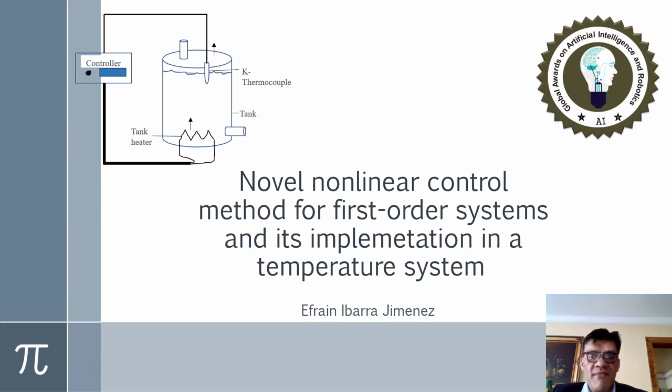The topics that we are going to cover in this presentation are the following: problem statement, main contribution, development theory for open loop control and closed loop control, simulations, and implementation in a temperature system.

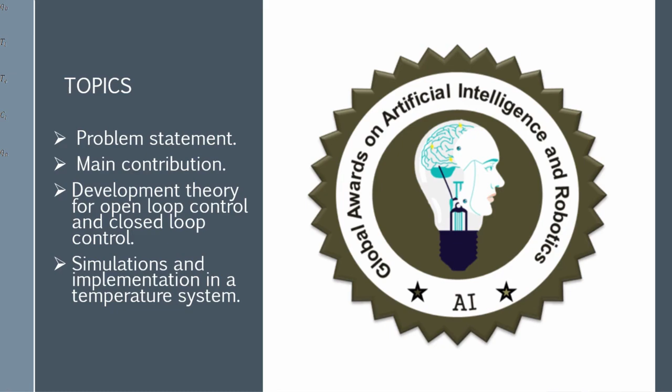Problem statement. Among the existing control theories for linear systems, the transfer function concept is commonly used in the design of industrial controllers, since the location of the poles and the definition of the type of stability and solution are easily known.

Therefore, for a linear differential equation, zero initial conditions are always assumed. However, this does not always apply to all systems. In addition, the output response is usually analyzed using an input control as the unit step, mainly because it is easier to obtain an analytic solution and the setting time when the solution is close to the reference at 98%.

For this reason, it is necessary to establish a theory that contributes to the proximity to the desired reference and to be able to control the slowdown or acceleration of the output response.

In this work, the main purpose is to develop a generalized nonlinear control theory that can be used in a first-order differential equation system for solving all the trajectory tracking problems, both for constant and time-variant references, and considering any initial condition.

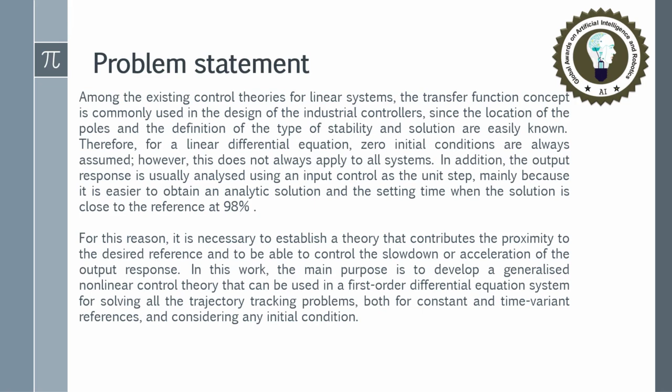Main contribution. The main contribution of this paper is to introduce a new control design method for a first-order differential equation that guarantees the following points.

Number one, the output signal response can follow constant or time-variant reference. Number two, the initial condition for a first-order differential equation can be selected with freedom, implying that the transfer function is no longer necessary, since this concept limits the realism of physical systems by considering that the initial conditions are always zero.

Number three, analytical solutions are found for tracking constant and time-varying references, which makes it possible to avoid using any numerical methods.

Number four, a closed-loop control formula is obtained for tracking constant or time-varying references. Number five, the designed controllers allow for acceleration or deceleration of the convergence rate to the desired reference.

Number six, the controllers can be automatically tuned to allow the desired reference to be reached with a small error and achieved in a finite time, which can be proposed to our liking, where this fact is defined in our article as the percentage convergence.

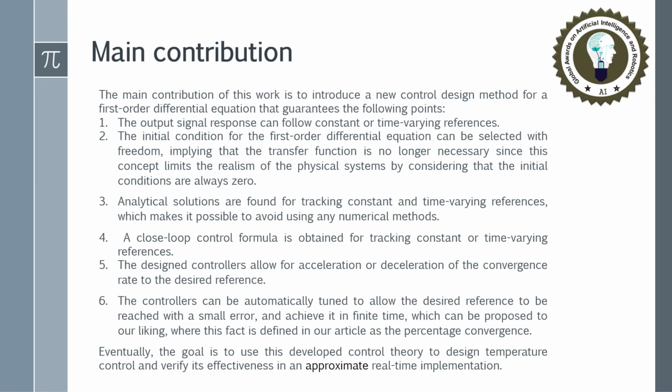Eventually, the goal is to use this developed control theory to design temperature control and verify its effectiveness in approximate real-time implementation.

Control theory designed for a first-order differential equation. Between the developed theory, we can find two different kinds of controllers, the open-loop control and the closed-loop control, where the main differences will be described.

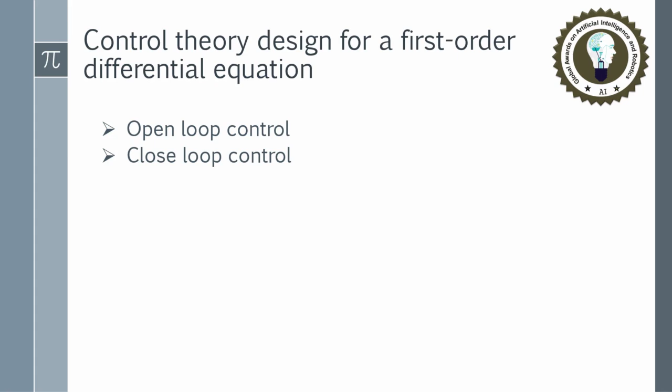Open loop control. Consider the first order differential equation given by expression number 1. Then, to guarantee the tracking to a time-varying reference R of t, it is necessary to introduce the following theorem.

Theorem number 1. For the system number 1, proposing the controller U of t given as this expression, with known references R and R dot, its solution is given by this expression. And we will have that the solution approaches the time-varying reference when time goes to infinity, only for values of a higher than 0.

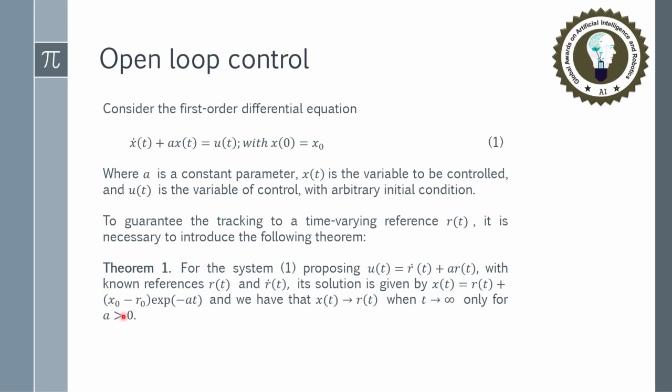Remembering that the error is given by the difference between the solution and the desired reference, we have the solution x of t is equal to r plus some initial error times exponential of negative at. And if the parameter a is higher than 0, then this exponential goes to 0 when time increases. Therefore, we have proven theorem 1.

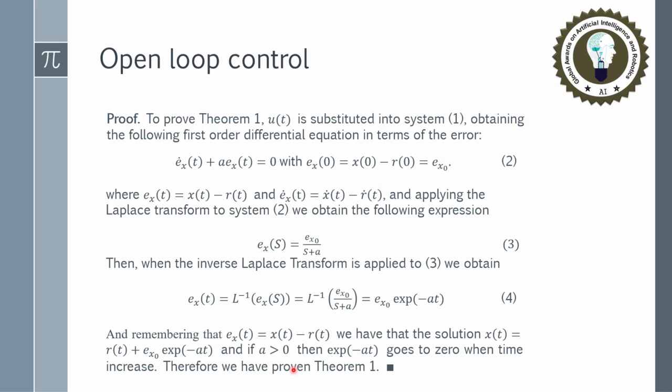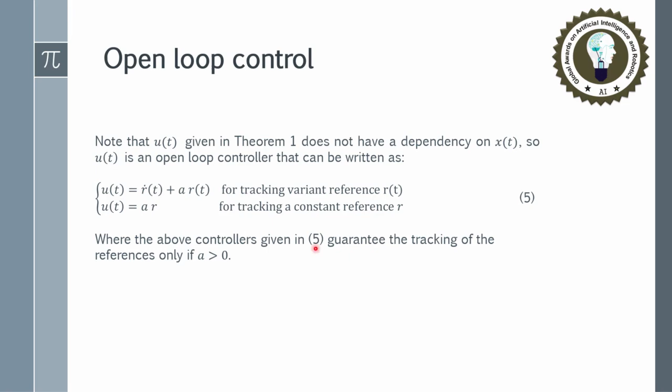Note that u of t given in theorem 1 does not have a dependency on the solution. So, u of t is an open loop controller that can be written as equation number 5, where the first serves for tracking a variant reference, the second for tracking a constant reference, where the above controllers given in 5 guarantee the tracking of the references only if a is higher than 0.

Closed loop control. Now, in order to control system 1 for any constant parameter a, and to make the solution track any reference, we introduce theorem number 2. For system 1, proposing that the control is given by this expression with k lower than a, and with known signal references r and r dot, we obtain that the solution will approach the variant reference when time goes to infinity.

Proof. For proving theorem 2, u of t is substituted into system 1, obtaining this first-order differential equation in the error dynamics. Now, applying the Laplace transform to equation 6, we obtain expression number 7.

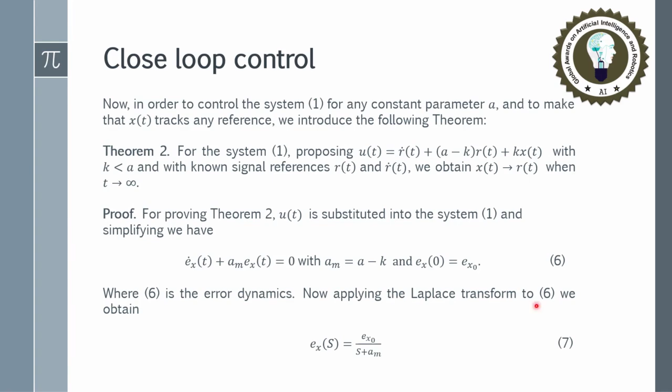And applying the inverse Laplace transform to 7, the solution ex of t is given as expression number 8. And remembering that the error is given as the difference between the solution and the desired reference, the solution x of t is given as expression number 9.

As in the hypothesis, k is lower than a, meaning a sub m is always higher than 0, implying that the negative of a sub m is negative. As a consequence, the exponential goes to 0 when time goes to infinity. Hence in 9, we have that x approaches the reference when time goes to infinity. Therefore, we have proven theorem 2.

Also, observe that the reference is constant for all time, then the derivative of this reference will be 0 for all time, implying that in this theorem, the controller will be given by this expression.

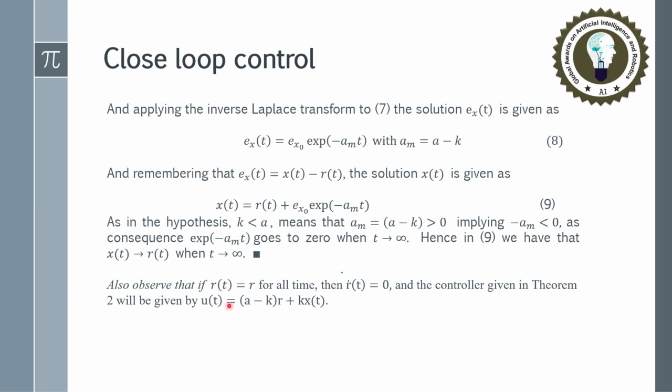Now, u of t given in theorem 2 has a dependency on the solution, so u of t is a closed loop controller that satisfies the following. Here we have this control that will serve for tracking a variant reference, and this will serve for tracking a constant reference. In both cases, the convergence to the reference can be sped up or slowed down.

Because in solution 9, the parameter a sub m, which is positive, can be modified with different values of k, implying that the exponential term decreases to 0 quickly or slowly, depending on the choice of k.

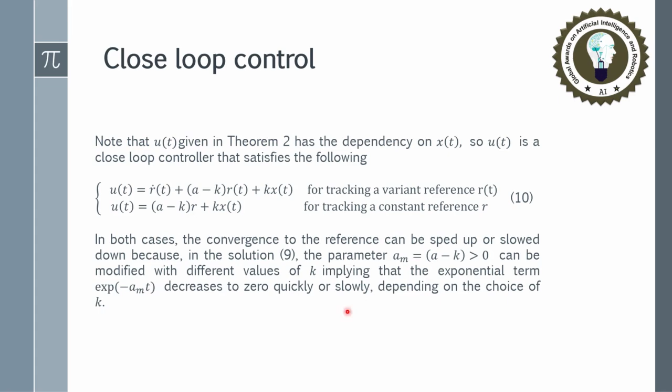The generalized settling time Ts. Now suppose that we have selected some k lower than a, and according to theorem 2, the solution approaches the variant reference when time goes to infinity. However, if I want to estimate the time Ts when the solution x of t is very close to the reference r of t...

...consider the general solution in terms of the error given by this expression, and suppose that for some time t equal to ts, we have the following, given in equation 11. The above implies that the exponential will be given by this expression when evaluated at this time ts. And when applying the logarithm to both sides, we obtain equation number 12.

Hence, equation 12 represents the necessary time to reach the P% of the initial error between x sub 0 and r sub 0, and Ts is called the generalized settling time.

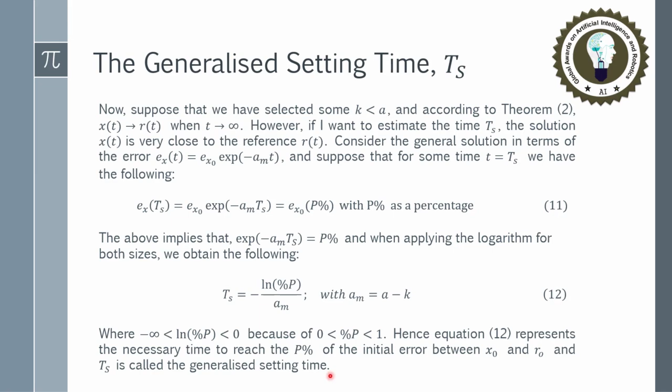Approaching the desired reference. To determine how close the solution is to the reference r of t at time Ts, notice that according to 10, this expression will be fulfilled, and then we will have that approaching the variant reference at this time will be given by 13.

And if the variant reference is constant for all time, this will be fulfilled, implying that the approaching to the constant reference will be given by expression 14, where 13 and 14 indicate how close the solution is to the reference at time Ts. And selecting an adequate percentage, the time Ts can be modified by assuming distinct values of k.

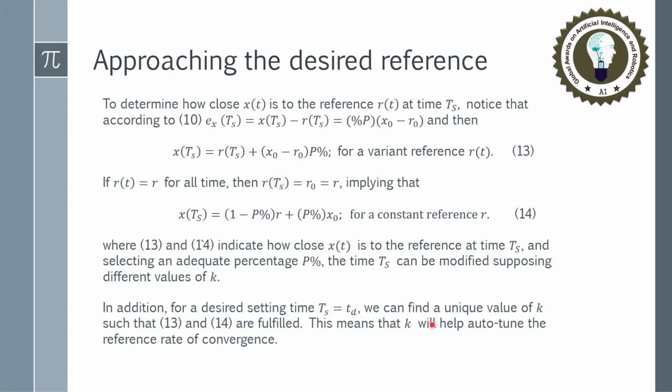In addition, for a desired settling time, we can find a unique value of k, so that 13 and 14 are fulfilled. This means that k will help auto-tune the reference rate of convergence.

Now suppose that we have selected some percentage and a desired settling time td. Therefore, we obtain 15, where the first represents how close the solution is to the variant reference at this desired settling time, and the second represents how close the solution is to the constant reference at this settling time.

In addition, satisfying 15 in a finite time TD implies being able to speed up or slow down the rate at which the solution x of t approaches the reference. Hence, to indicate the approximation, expression 15 is called the percentage convergence.

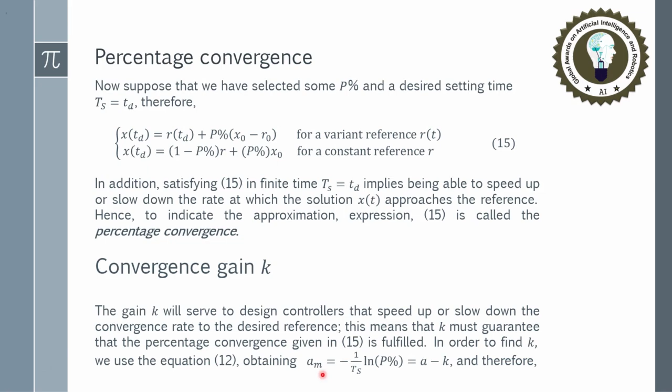Convergence gain k. The gain k will serve to design controllers that speed up or slow down the convergence rate to the desired reference. This means that k must guarantee that the percentage convergence given in 15 is fulfilled. In order to find k, we use equation 12, obtaining that am is given by this. And therefore, k is given in 16.

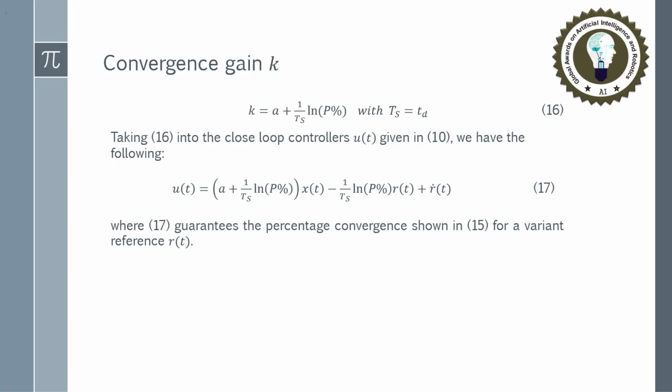Taking 16 into the closed loop controllers u of t given in 10, we have expression 17, a controller that guarantees the percentage convergence shown in 15 for a variant reference r of t. Loop control formulas.

Here we have the setting time Ts for different percentages, where this table is useful to obtain all the closed loop control formulas for tracking a variant reference, given by expressions 18a to 18c. This controller satisfies the percentage convergence for a variant reference. In the case of a constant reference, this will be 0.

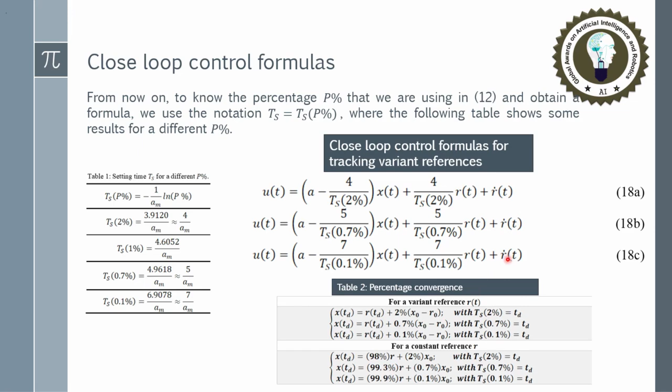Simulation example using a closed loop controller. Example 1: consider the system given in 19 with a reference r of t given by this expression.

To achieve the percentage convergence given by this equation in a desired setting time td, we use the closed loop control 17, with percentage equal to 0.7%, implying the use of control formula 18b. With setting times td equal to 10 and td equal to 25, we obtain the following controllers, 20a and 20b.

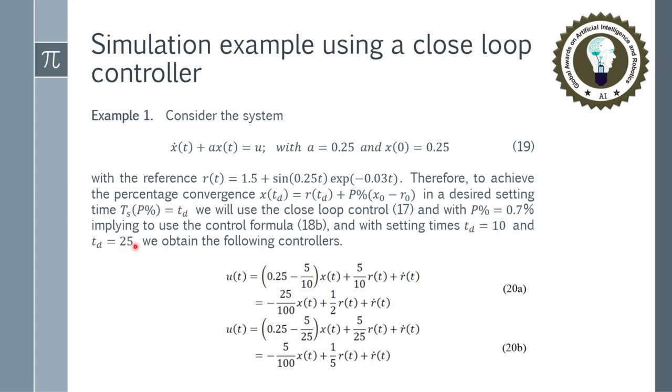Following example 1, figure 1 shows that the solution x of t approaches the reference r of t, and the percentage convergence is fulfilled in the respective setting times td, shown here, when controllers 20A and 20B are applied to system 19.

Likewise, figure 2 shows the controllers 20A and 20B.

Simulation example for tracking a high-frequency reference using a closed-loop controller. Example number 2: consider the system given by this equation with parameter A equal to 0.3 and initial condition -2.

To visualize the dynamic behavior of the solution tracking high-frequency references, the closed-loop control U of t given by this expression is designed, considering tables 3 and 4.

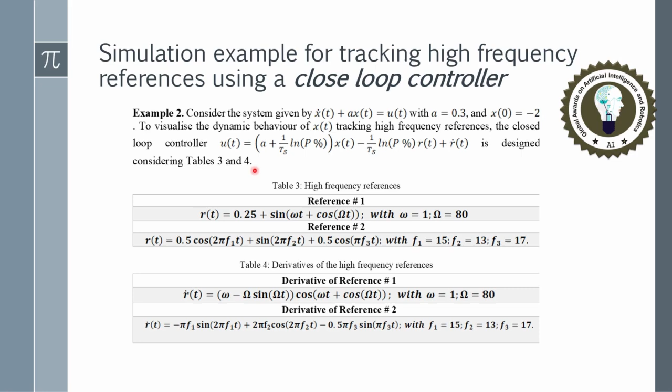To fulfill the percentage convergence given by this equation, we propose that the percentage is given by this, with a desired setting time of 4 seconds. Therefore, the controller U of t necessary for tracking each reference is given as follows.

Thus, when we apply controller 21 to the system, the solution x of t tracks the desired reference with high frequency intervals, as seen in figures 4 and 5.

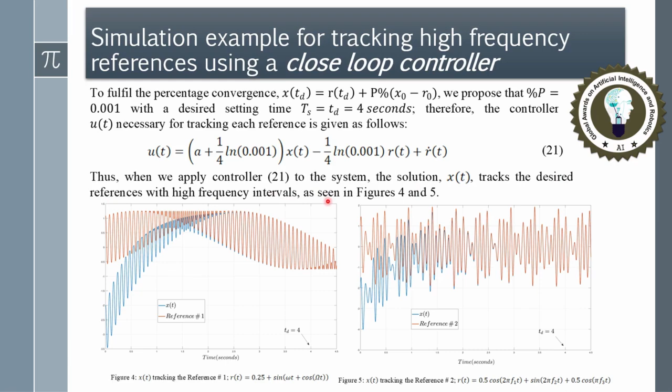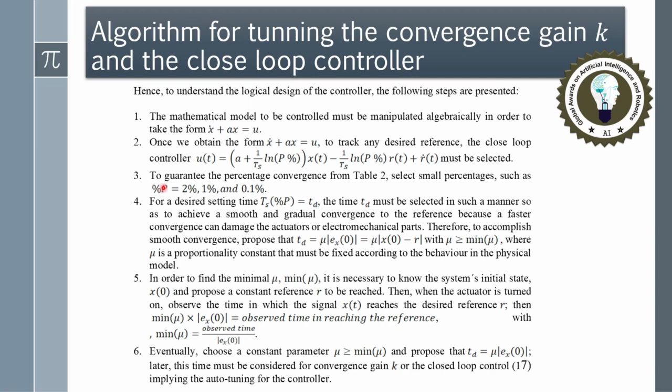Algorithm for tuning the convergence gain K and the closed-loop controller. Practically, we follow 6 points to guarantee the perfect tuning of the closed-loop controller.

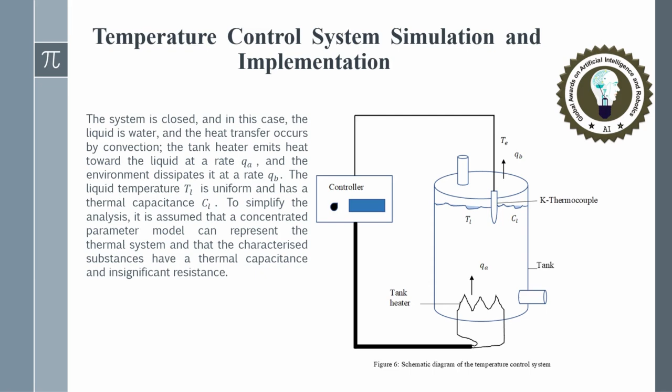In order to obtain a first-order differential equation in terms of the temperature of the liquid, we consider that the external temperature Te and the liquid temperature Tl are measurable. We also consider equations 22 and 23.

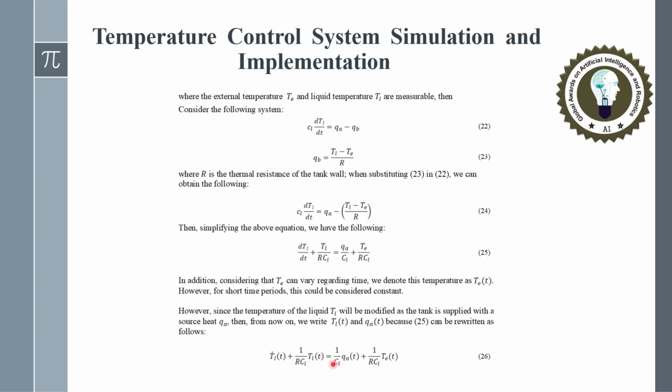Substituting 23 in 22, we obtain the expression given in 24. Simplifying the above equation, we have expression 25. Finally, with further simplification, we obtain equation 26, which serves to design the thermal controller given by QA.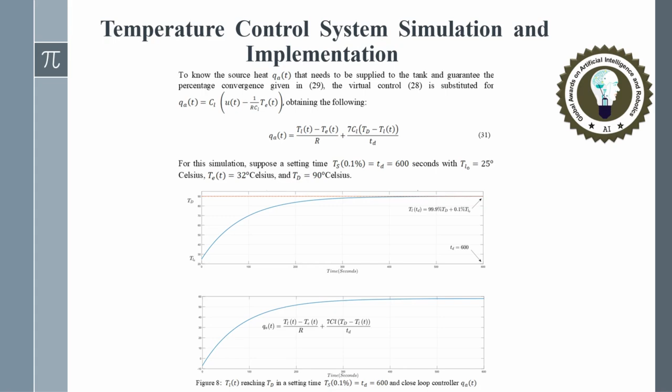For the application of the developed theory in the physical prototype of this work, follow the next algorithm. Results and discussions.

The design of a novel nonlinear control method theory for first-order systems was properly validated, as seen in the simulation results. Moreover, in the implementation prototype, the setpoint signal in blue color

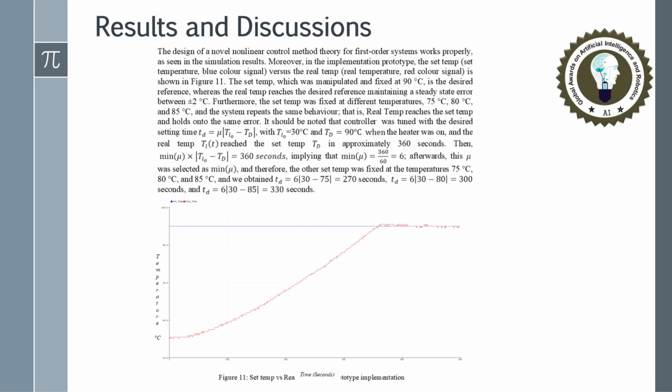versus the real temp signal in red color is shown in Figure 11. Other results and discussions can be consulted and read on this slide.

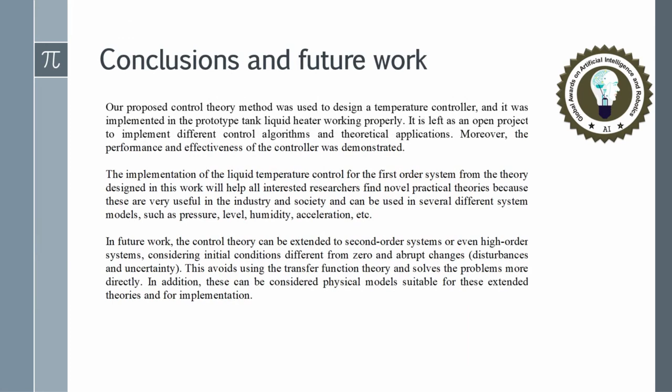Conclusions and future work can be consulted and read on this slide. Thank you very much for your attention.